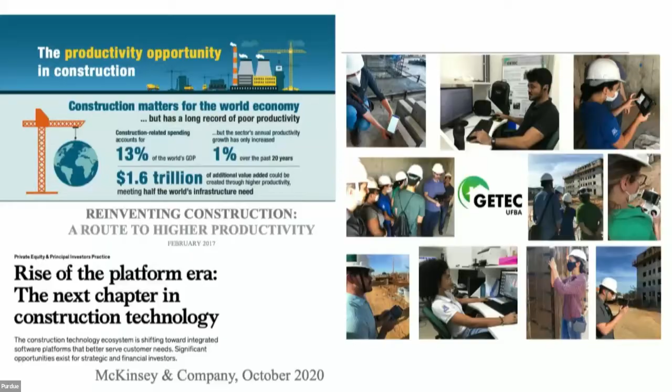We developed several works trying to introduce technology into construction sites, but we are also trying to develop a concept of what the future of construction is for us. We talk a lot about construction 4.0 nowadays, lean construction 4.0, industry 4.0, industry 5.0, and we are trying, specifically in Luara's work, to understand how this can fit together. We know there are several names for this digital revolution, but we are trying to understand how we can name these in our works. This doesn't mean it's the best concept, but it's the one we are trying to use.

So we are calling all of this an intelligent construction environment. Why? Because we are using the foundation of Industry 4.0, Construction 4.0, and some principles of Industry 5.0 to define that this intelligent construction environment is an efficient, resilient, human-centered and sustainable environment composed of a complex socio-technical system that uses technology as a tool for continuous improvement.

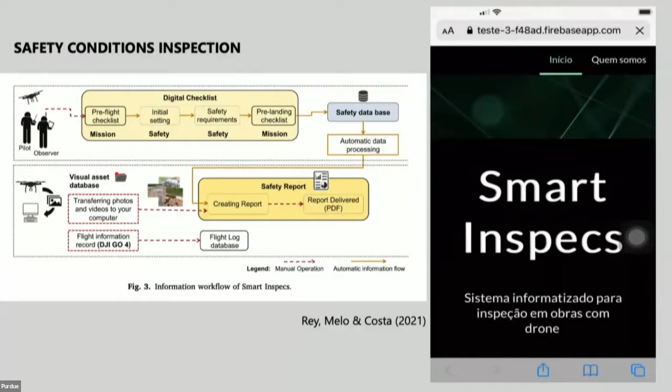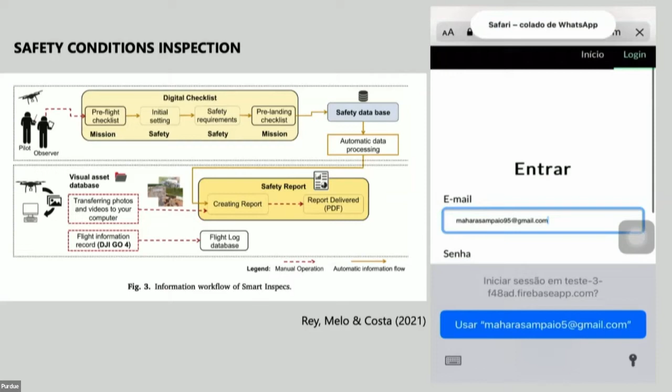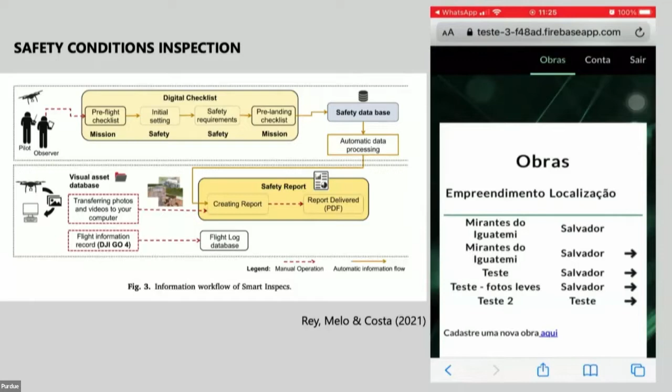So the first application: safety. Let me start the video. First of all, we had to develop a protocol to collect data at the construction site. For safety, in Brazil we have standards - I'm sure here you have regulations too - so we use the standards we have in Brazil as part of our checklist.

So with the drone, first we collect data by flying the drone, and we have a mobile device with a checklist based on the safety regulations. We fly around the construction site using the mobile device, checking conformity or non-conformity for each regulation that applies to the construction site - because we have several, but it's not necessary to inspect everything since it depends on the phase of construction. Based on the data we collect - the drone takes pictures, and we use the mobile device checklist - we put everything together in our platform and provide a report to the manager.

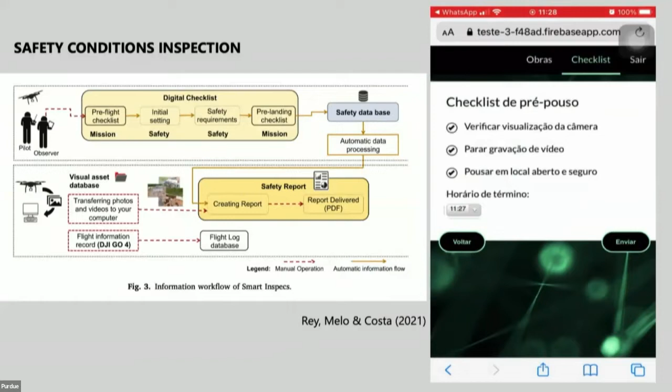So this is the software that we have - we put everything into this system. We have a pre-checklist to guarantee that the flight will be safe, we have the safety checklist, and we have the pre-landing checklist, all in order to guarantee that everything is safe.

We don't just want to develop a checklist using drones. We want to embed this into the safety management process. So in this work, what we develop is how we can incorporate this technology into the production and safety management process. Safety itself in Brazil is hard.

We are always trying to look at safety and production together, not separate. Mahara Lima Works tried to incorporate this. We need to plan as usual, go to the site, plan what's going on, what safety measures we need to establish, and implement these on the site. Then we can use the Smart Inspecs, and remove constraints before, in order to guarantee that the safety measures are in place.

Then we can use the Smart Inspecs as the check. We use all the information that we have, the safety report, the action plan. This is an example of the report that we can get from the system. For each non-conformity, we have a picture taken from the site showing the manager, hey, this is the problem you have, this is why this item is non-conforming.

As a result, the second application regarding safety—we notice in Brazil we use a lot this guardrail system. Most of our work is related to residential projects, and in these, mainly low-income projects, we use a system called cast-in-place concrete. So it's fast, you can produce one floor in one day with everything, but we have loads of safety problems because it's too fast.

During the day they assemble the bars, the formwork, and the concrete in the afternoon, and the second day we have to remove all these safety guardrails for the next floor. This process is super fast, and we are noticing that there are several flaws in these guardrail systems.

Last year we developed an approach using artificial intelligence and images from drones to automatically recognize these flaws in the guardrails. First we tried to identify whether the algorithm could recognize if there's a guardrail or not. The precision is very high—it's quite easy to say whether there is or isn't a guardrail in place.

Then from the database we had from these safety condition projects we collected, we tried to identify the main problems in the guardrail—for example, spacing between guardrail elements, or no existence or incomplete guardrail system. We mapped all these failures, used the database to identify them, and trained the algorithm.

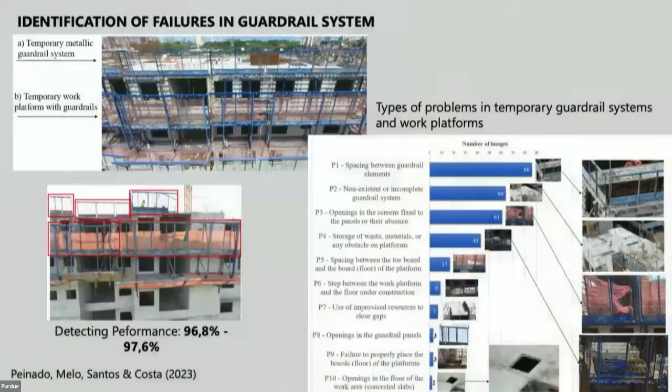We decided to focus on three of these problems, the main ones, because we had more photos and the database was better for them. We tried to develop an algorithm, based on computer vision and deep learning, to see if the flaw could be recognized automatically or not.

So far this is an ongoing research, and we are having okay results: 73% probability to identify non-existent or incomplete guardrail, 71% automatic identification of spacing between guardrail elements, and 68% for openings in the screen fixed to the panel.

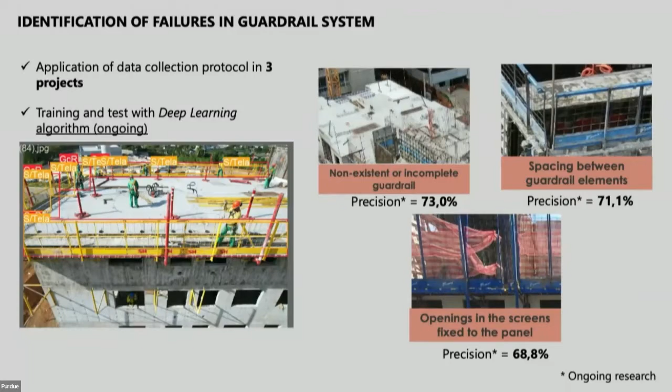What is the problem? In construction, everything is very similar—you can check these guardrails, they're gray, and the cast-in-place concrete is gray too. So most of the time the algorithm has difficulties identifying things when everything is very similar. This is why we are asking for help from PhDs in electrical engineering to develop more powerful algorithms that can address this.

Because at a certain level, we have some limitations in this study, so we need this partnership with the guys. In terms of outcomes of Smart Inspecs safety, we implemented these protocols in 5 residential projects. Currently, we are developing a huge program in infrastructure projects in Brazil. We are building a rapid bus transit and a new bus station for the city, with loads of roads and streets, and they hired us to develop this inspection.

It's much more about testing if our system works for infrastructure than developing the system itself. We are using the same system that we developed for residential. We are having several challenges because it's completely different. It's a very open type of project with different types of works, but it's doing well.

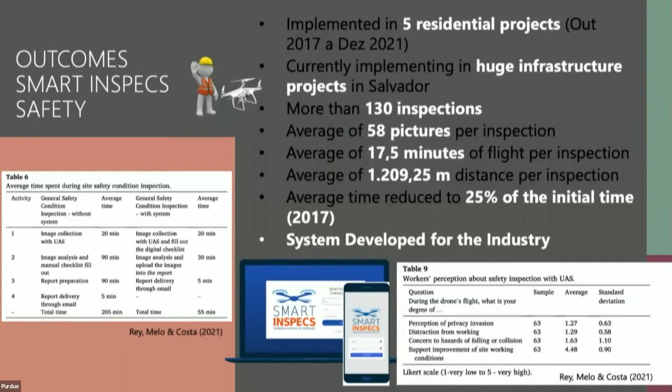And we also look at support for improvement of site conditions. These are the 4 questions we ask the workers. In general, you can see they have a low perception of privacy invasion, distraction, and concern about the hazard of falling, but they feel that this method supports the improvement of the work a lot, on a scale from 1 to 5.

So we have these good results, and in Brazil we don't have this problem of privacy invasion. Sometimes in other countries it could be more important, but in Brazil it's not a big problem.

Another very good outcome of this work: in 2021, during the pandemic, we developed a similar system for the industry. In a big innovation project, 5 construction companies invited us to develop this system for them. So we have our own system, and we developed another one for these 5 construction companies so they can use it their own way. This is a huge achievement for us, because we are putting our platform into the industry itself.

Okay, the second application is roof and facade defect pathology. We had a similar approach to this. I'll speak a little faster. For the roof, we got a demand from a construction company that we partner with.

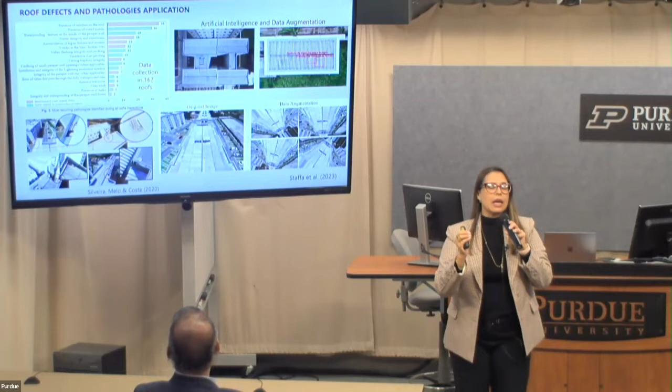They asked us, hey, we are having loads of roof problems in our buildings, not during construction but during use. And because of the guarantee the construction project has to provide to users, some of the problems were credited to the construction company and not to maintenance. So they asked us to find a way to use drones and collect this information faster, in a more timely manner.

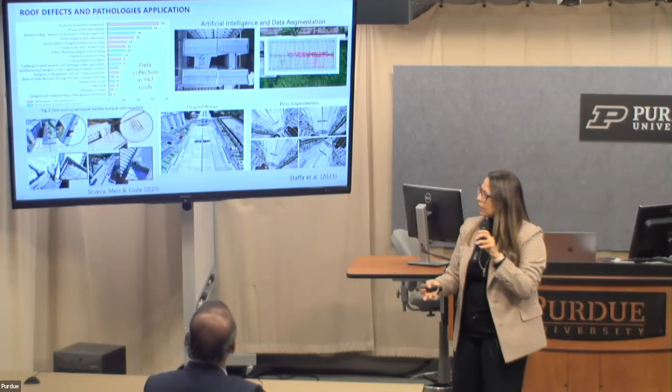So we started this work, collecting data from 167 roofs of this construction project in use. We identified the main problems we could see in the roofs and established a small database for each problem. Then we did the same for the guardrail. We identified the problems and started using artificial intelligence. We developed an algorithm to identify the problems — you can see the square here, and another square here. We trained and tested on these main pathologies.

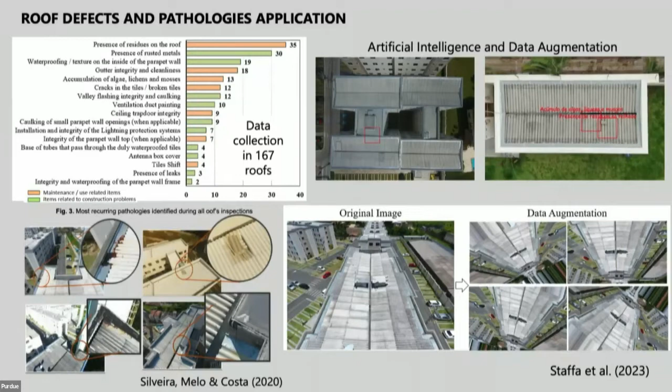We use also data augmentation to improve our database because we had problems. And then we got the results. In the end, we could identify through the algorithm 11 of these pathologies, so we can recognize them automatically, and we embark this in our system.

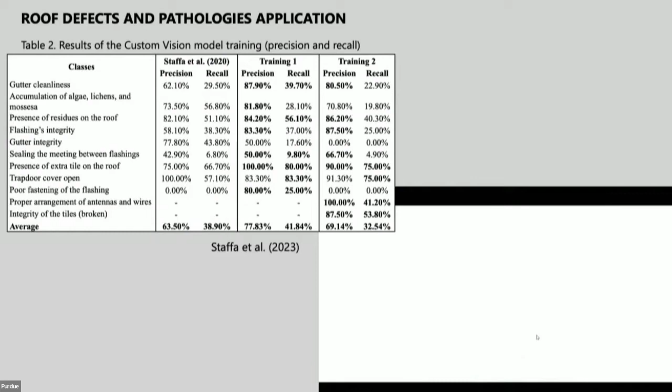So now we can go to a construction site, fly the drone, collect the image, put all the images in our system, and automatically we can recognize 11 of the pathologies that we had identified. The rest that we cannot identify automatically, we use manual inspection. So this is something that we improved a lot, the maintenance process of the construction company that is our partner.

This is an example of this. I will show you the time that we do this. It's very fast as well.

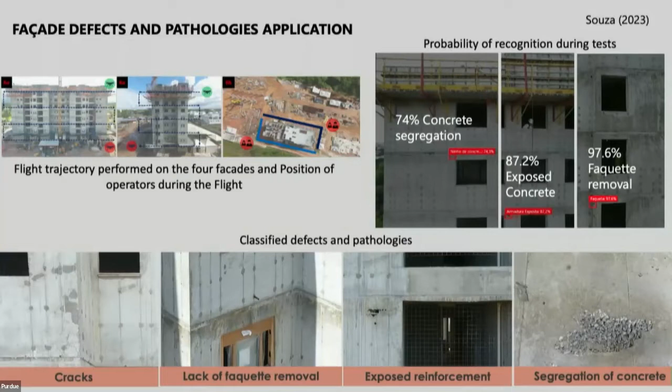So similarly, we did this for the facade. We have the roof, we have the facade. We develop a protocol to collect the data. We identify the pathologies that we can see with the drone, and we can use the algorithm for this. We have the result here of the probability of recognition during test, and then we also incorporate this into the construction routine.

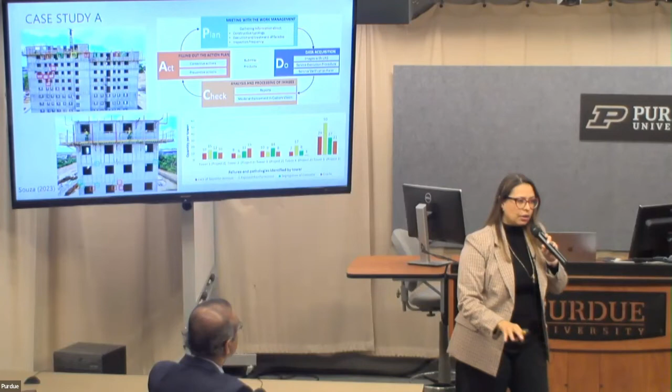Here, the facade is during the execution, not after, not in use, because in this work we want to solve the problem during the execution. So we are adding this work into the quality management process, and we provide these reports to them with all these squares in different colors related to the pathology we could identify automatically - for example, the lack of faquette removal, the reinforced exposed, the segregation of concrete, and the cracks.

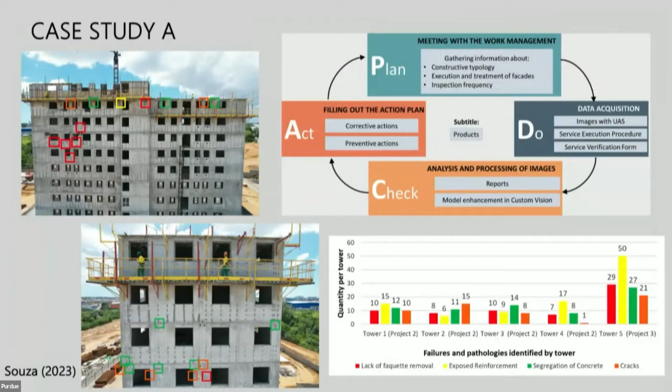And also we try to incorporate this into the quality management process during the execution phase. So this is always our idea: develop a method and incorporate it into the construction process.

Some results, some outcomes of this: in terms of roof, we collected data in 13 projects, 211 roofs. We don't have enough database yet, but we have a database of more than 3,000 photos, and some of these with the problems.

And in terms of the facade, we developed this project in 3 projects, 9 towers, and we have this database. Again, in terms of average time, when we embed it in our system - the roof is embedded, the facade is not embedded at the moment. We are working on this.

But we can provide information in 35 minutes. We can fly the drone, 26 minutes - the project is around 6, 7 small towers that we can collect data from. We download the photos in 1 minute, we check the work in 2 minutes, and the automatic process report is generated in 4 minutes. So in 35 minutes, we can collect the data, process the data, and provide the report to the managers. This is very good for us.

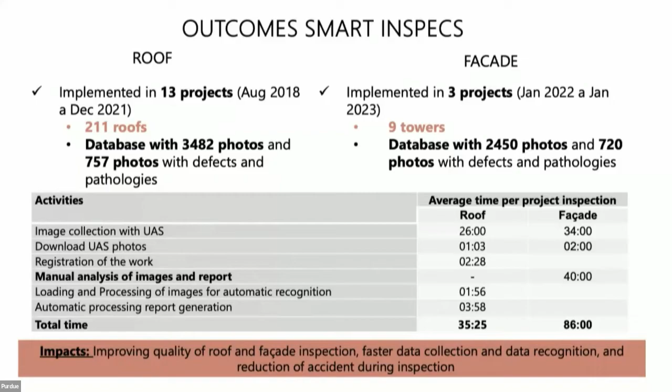And the last application is the application in progress monitoring. We started this in 2018, and we still have a lot to do in this area. We started developing this overlap of cloud point.

We can fly the drone, collect the image, process this, and provide a cloud point of the building. And we overlap this with a 4D BIM, and then we can provide indicators about the progress of the project. We have two problems.

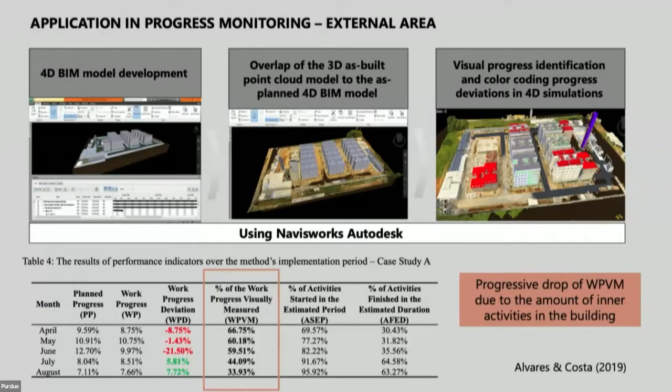First problem: we still have several projects without BIM. Second problem: we are still having two manual activities to overlap the point cloud and the 4D BIM. We need to develop things. I know that Manny in Illinois, he's the guy - we try to follow him a lot. I know he knows how to do that, but we are still working on this to have our own solution.

But more than this, when we start to develop this work, when the construction is outside, we can use this strategy a lot.

But as soon as activities start happening inside the building, we can't use this strategy anymore because we cannot capture this. So here we have some data. In August and April, we could see this indicator we developed, work progress visually measured. In April, the project was very open, so we could see a lot from outside. But by the time construction started developing inside the buildings, we could only see 33% of the project with our methodology. It's very manual, there are many problems, and we cannot see everything.

Then we decided to use the 360 camera to see if we could add value to the internal activities. Yes and no, I can say. At the beginning we had the hypothesis that we could develop a point cloud as well, and put together the external and internal point clouds, overlapping them with the BIM. It doesn't work very well, it's very time consuming, and we have different things. So it was one strategy, but it's not working very well.

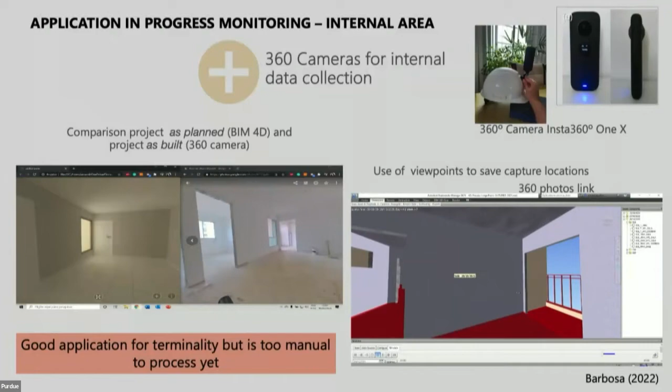Okay, I'm about to finish. So to finish the presentation, after all this work we developed, we noticed that construction projects still have problems incorporating all this technology, because of process, infrastructure, or other things.

This is why, three years ago, I approached Luara and said, hey, what about thinking about a measurement system to measure how construction projects are doing in terms of this digital transformation, how we can measure the evolution of this project? What about this? And Luara said, okay, let's do it. It's the challenge, you know? We have a vision and we ask the PhD student to develop this vision. Luara is in, and then we start to develop this maturity measurement system for an intelligent construction environment.

So the idea is, the question behind it is: how can the construction industry be positioned towards digital transformation? We are using maturity models as a tool to assess the effectiveness of the system. So we are trying to develop this maturity measurement system. Luara, I'm sure, will have time to explain this model to most of you if you're interested. But the idea is to develop measures that can cover all of these dimensions.